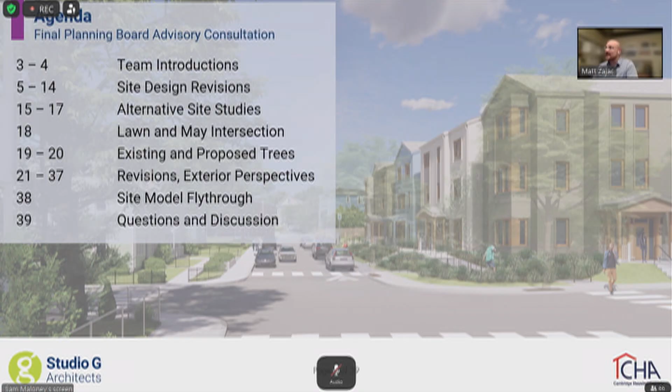Stepping back for a moment, CHA has been proud to serve the community for 90 years. CHA serves approximately 7,700 households, or 7% of the population of Cambridge. We also have a robust waiting list with over 14,000 unique households on it. Through our redevelopment projects like Corcoran Park, we seek to serve both our existing households and those families in need on our wait list.

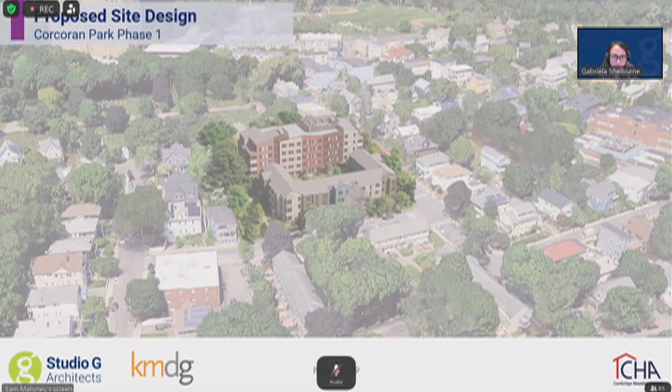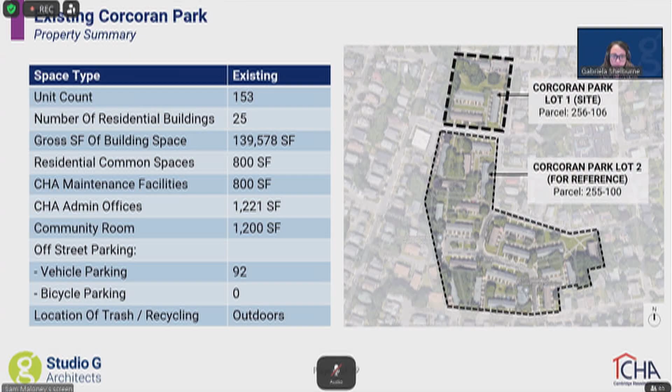Corcoran Park consists of 2 lots separated by Lawn Street. It is currently composed of 153 units in 25 buildings and 92 parking spaces over 2 parcels. Tonight, we're focusing on Lot 1, the northern parcel of land outlined on this slide. Lot 1 is bounded by May and Lawn Streets to the east and south, and the Belmont Cemetery to the north. In this lot, there are currently 29 dwelling units in 4 two-story buildings, 14 parking spaces, and 25 existing trees.

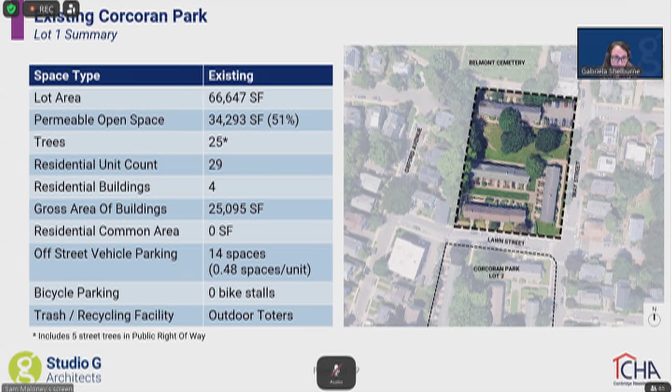The proposed redevelopment of Phase 1 will replace the 4 existing buildings with 2 buildings, increasing the unit count from 29 to 67. Changes to the proposed site design metrics can be seen in bold text on this slide. Based on advisory feedback, the total number of trees has been increased from 75 to 81. On-site parking has been reduced from 36 to 33 spaces, and short-term bicycle parking has been increased from 8 to 12 spaces. All other design metrics remain the same from our last submission.

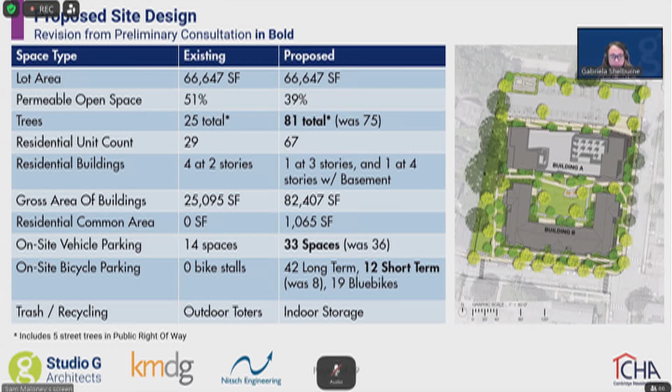Looking into the proposed development summary, Building A has 46 units, while Building B has 21. Between the 2 buildings, we propose 13 one-bedrooms, 39 two-bedrooms, and 15 three-bedroom units. On the following slides, you'll see numbers in purple. These correspond with the advisory feedback and development responses found in Volume 1 of the final submission materials.

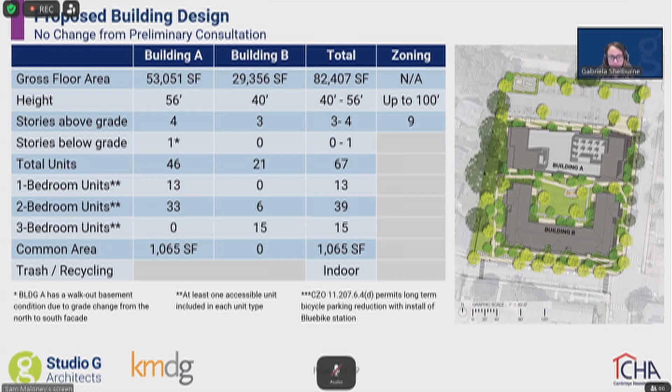Here is the previously submitted site plan. Planning board members and city staff asked that the development team consider several improvements, like continuing to explore the central courtyard design to improve its functionality, reducing the size and visibility of on-site parking, and coordinating with city staff on the curb cut location and design, improving the pedestrian experience particularly at the entrance of Building A, optimizing access to bicycle parking, and reconsidering shared balconies at the inside corners of Building B.

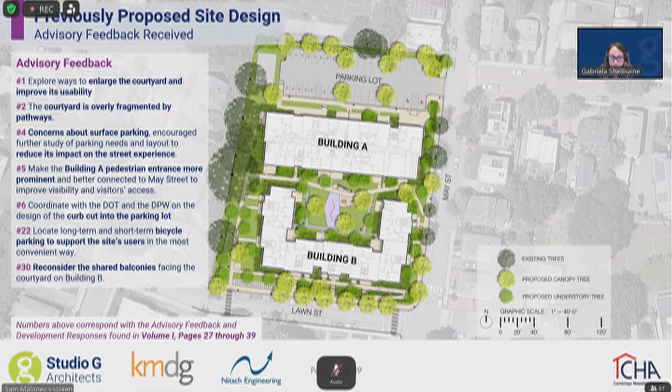To improve pedestrian connectivity, we've redesigned the main entrance to Building A, facing May Street. Three parking spaces have been removed, making room for an enlarged entry plaza with multiple connections to the public sidewalk for improved access, visibility, and pedestrian activity. This includes a front porch with fixed seating that faces May Street.

Between Buildings A and B, we've added a side stair to increase the central courtyard's connection to May Street. The community room terrace has been enlarged for greater community engagement.

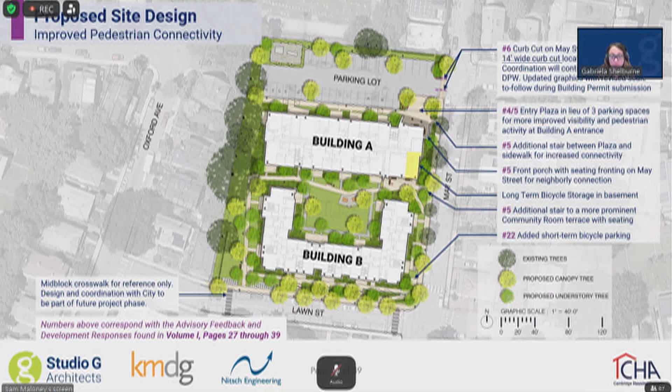Additionally, we've added 4 short-term bicycle parking spaces at the corner of May and Lawn Street. This evenly distributes short-term bike racks at the 3 public-facing corners of the site. As a reminder, long-term bike parking is located in the basement of Building A in the highlighted area.

To reduce the size and visual presence of the surface parking lot, we've reoriented the Eversource enclosure in the top left corner of the site, which allows parking to shift away from May Street. Where the parking lot is close to the sidewalk, we've located public art, fencing, and additional plantings to better mask the parking from public view and draw visual focus to the entry plaza.

We have also been coordinating the design of the curb cut with Cambridge DPW and DOT. Although this graphic currently shows a 20-foot wide curb cut, we intend to match the existing curb cut, which is 14 feet wide, shown here in purple. A narrower curb cut will reduce the amount of pavement visible from the public realm and further prioritize pedestrians by shortening their path across the drive aisle.

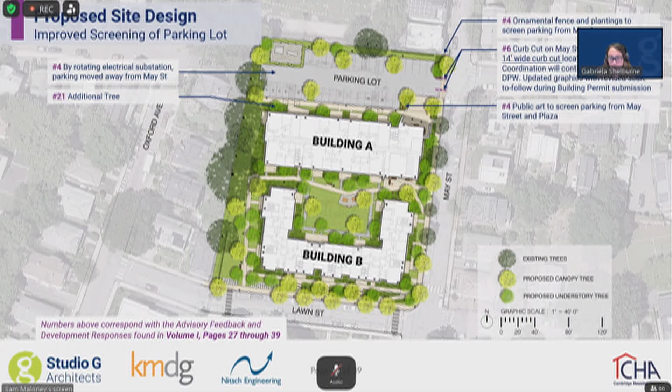Updated graphics will follow for future coordination with city staff and to be used when applying for a building permit.

We've removed the shared patios and decks from the inside corners of Building B, which were a bit problematic. To improve the open space design, internal pathways have been revised to prioritize contiguous open space rather than fragmented clusters of smaller lawn areas. Along the western side of Building B, pathways to entry porches have been consolidated, and the pathway connecting the courtyard to Lawn Street has been shifted east towards the building, giving way to a larger shared yard and less fragmented front yard zones for the units on this side of the building.

In the courtyard perimeter, paths have been pushed closer to the building, making way for a larger flexible lawn area.

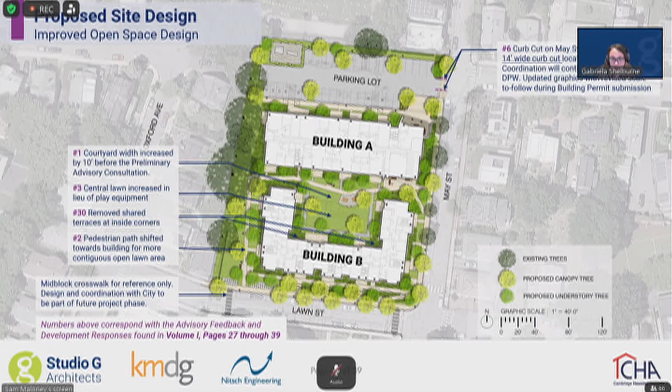You can see that the play area has been removed from the central courtyard, given that this lot is well served by existing public playgrounds. Play areas will be included in Lot 2, which offers greater flexibility to accommodate them. Here you see the Haggerty School and the Glacken Field playgrounds within a quarter-mile walk from the site.

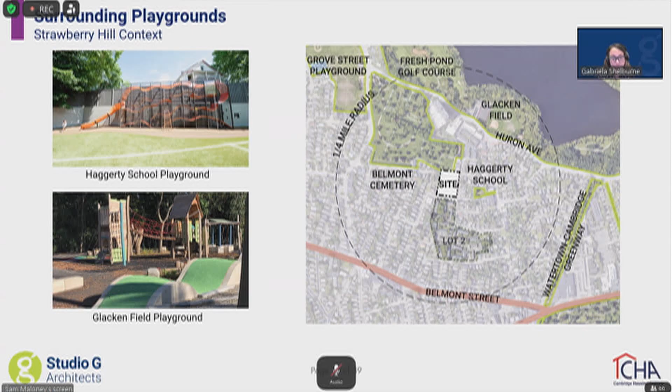In the previous meeting with this board, there was great discussion about the amount of surface parking included in the site design. It was suggested that the development team shift some or all parking below the building and extend Building A along May Street into an L-shaped footprint. The development team studied a variety of options and found that the pros did not outweigh the cons.

CHA analysis has found that podium parking below a building comes at an additional cost of $50,000 per unit, which would push the project budget out of alignment with available funding sources.

And while an extension of Building A would increase the project density, it would also compound the existing parking issues in this neighborhood, which throughout the years of community engagement we have consistently heard from residents and neighbors that parking is in high demand. CHA conducted a parking census, which informed the 0.75 cars per unit ratio the site will offer when all phases of construction are completed.

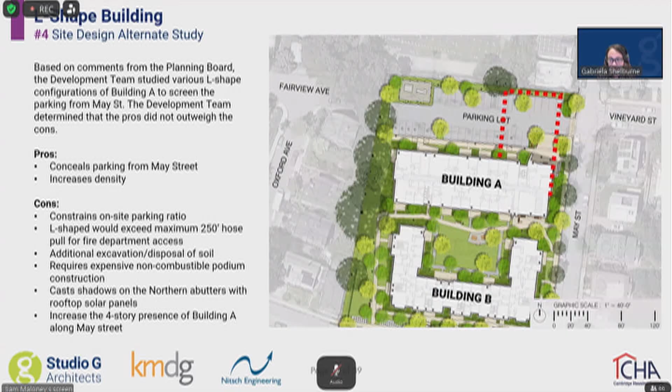This target ratio has also been informed by the fact that Corcoran Park is not well served by rapid transit, and residents have jobs with hours and locations beyond the MBTA service schedule.

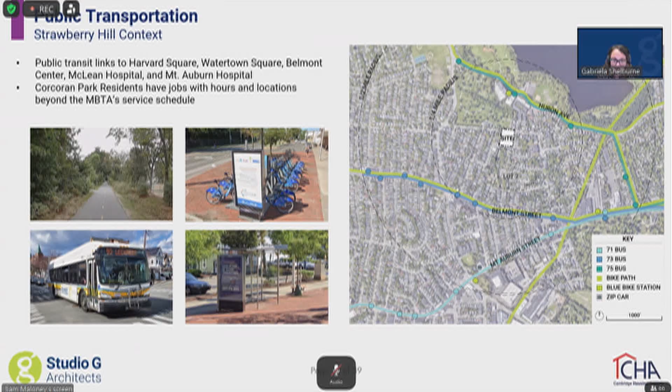Another topic of discussion at our December meeting was a vehicular, bicycle, and pedestrian connection from the parking lot to Fairview Avenue. CHA's community outreach confirmed that this path is not desired by residents and neighbors, as they have advocated against it.

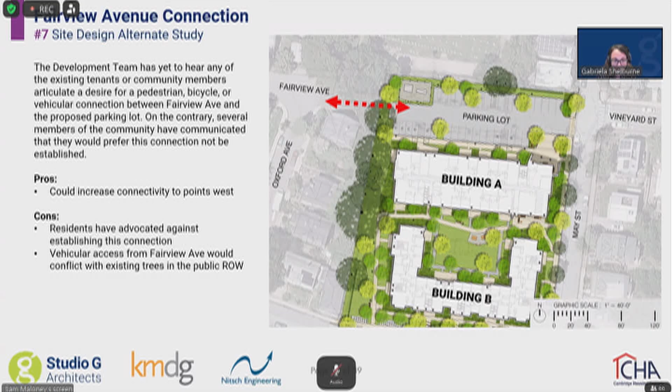Turning your attention to the southeast corner of the site, we've begun coordinating with Cambridge DOT and DPW on the atypical large curb radius at the corner of Lawn and May. They have confirmed that this intersection was rebuilt within the past 10 years. There is preliminary indication that the existing condition can remain as is, but we will continue to coordinate with them on any potential improvements to this intersection.

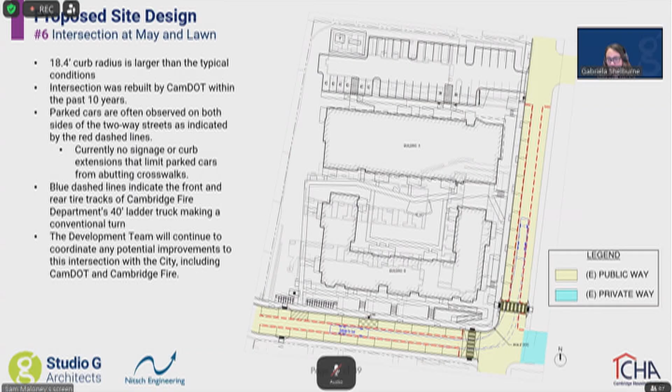I would like to shift to Mark now to respond to feedback about trees and plantings.

Thanks, Gabby. My name is Mark Klopfer. I'm a partner at Klopfer Martin Design Group, and we're the landscape architects for this project. Good evening, everyone.

The planning board asked for the clear articulation of existing trees to remain, and those which are planned to be removed, classified by their health. 17 of the 25 existing trees are intended to remain. As you can see, these are along the perimeter of the site where they have the greatest likelihood of surviving the demolition and construction process. It's shown here on the left of the plan.

Trees highlighted in red are the 8 existing trees to be removed. 5 are in good health and 3 are in fair health. Trees have been proposed for removal either because they are directly conflicting with the new building location, or the grade is incompatible with the grades required by the new FFE requirements.

We investigated options to relocate trees to be removed. However, the trees are not suitable candidates for relocation due to their health and their sizes.

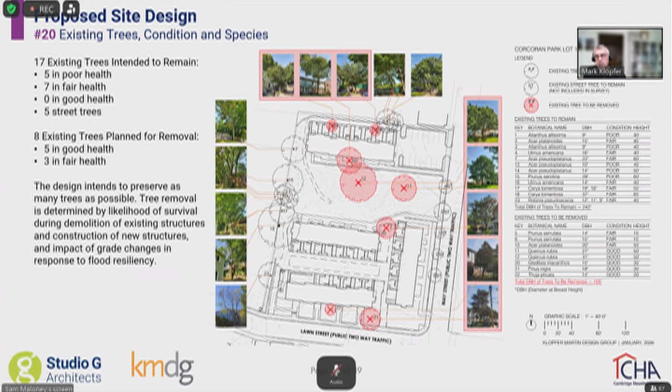Looking at the proposed condition, the design intends to add 64 new trees of various sizes and species. In our previous meeting with the planning board, we were asked to quantify the existing and proposed tree coverage on the site. We've used the diameter of breast height as our unit of measurement for this exercise, and found that the proposed conditions will provide 23 additional tree caliper inches than the site's current conditions.

You can find our full materials and plantings in volume 2, page 36 of the final submission materials, which include a diverse selection of both native and non-native species. Plant selection and location will be based on species suitability for the various conditions found on site.

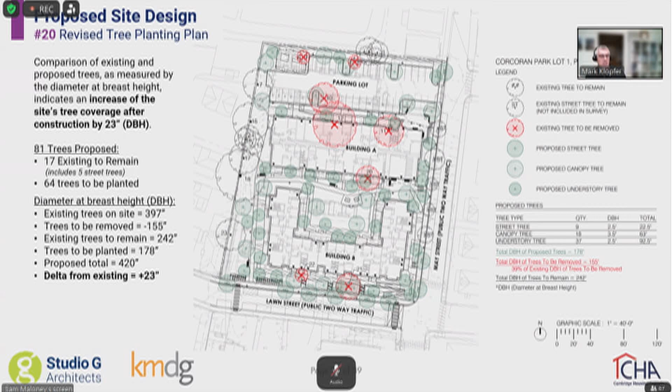And I think I'll turn it over to you now, Sam.

We'll now shift to the rendered perspective views to outline advisory comments received and the corresponding design revisions, as seen from the public realm. The remainder of the slides will feature perspective images with a key plan in the bottom right corner for reference. In this aerial, we're looking at the southwest corner of Lot 1, with Lawn Street in the foreground and Fresh Pond beyond.

As a reminder, Building A and B flank the central courtyard. Building B is seen in the foreground at 3 stories with a pitched roof. Building A, the taller red building, is 4 stories over a walkout basement.

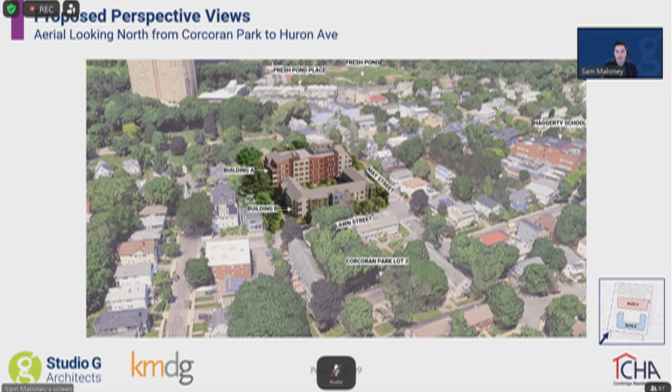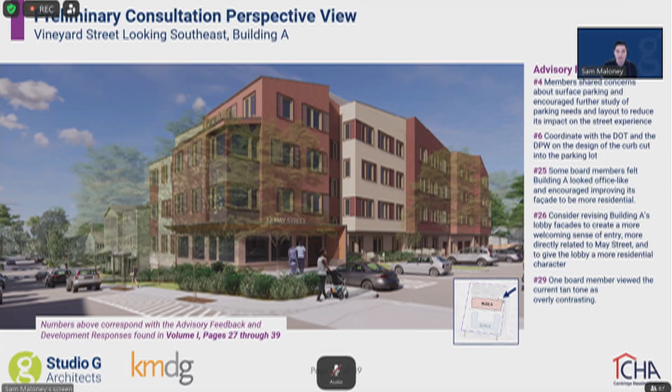As Gabriela shared on the site plan slides, 3 parking spaces were removed to make way for an entry plaza that extends out from the building's front door to May Street. This plaza includes fixed seating, visitor bicycle parking, and multiple connections to the May Street sidewalk to prioritize pedestrians.

At the back of the public sidewalk, just behind the dog walker in this rendering, a planting zone with low shrubs and a shade tree defines the boundary between public and semi-public space, while adhering to the zoning requirements for vehicular sight lines at a curb cut.

The plaza is bookended by a more densely planted area, seen behind the bicycle and seated woman in this view. The low and medium height plantings, combined with a public art installation, help to separate and screen the parking from the pedestrian environment.

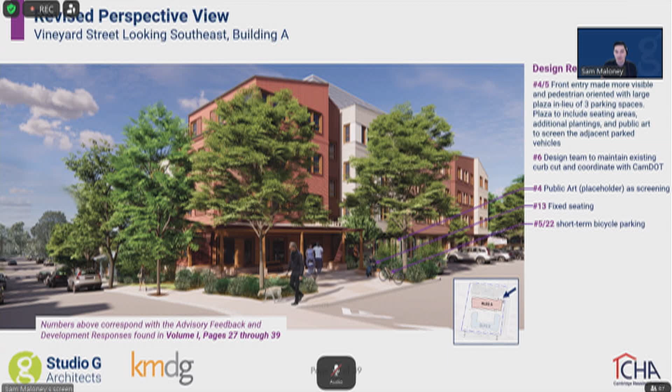To improve the welcoming and residential character of the buildings, the entry canopy has been redesigned with columns and more traditional details in reference to porches found throughout Strawberry Hill. The lobby windows have been revised to look less like a commercial storefront and more like large picture windows. In fact, many windows throughout the building now feature a horizontal mullion to look more like a traditional double-hung window.

The development team also made small adjustments to building colors and material types, resulting in a more vibrant and harmonious color palette that establishes a distinguished base, middle, and top to each townhouse-like bay of the building.

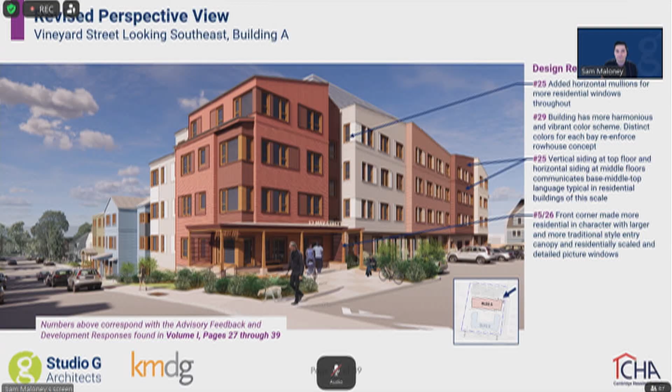The development team proposes a fence behind low, medium, and tall plantings to ensure that the parking is screened from view in all seasons. The fence is designed to maintain the character of the entry plaza, creating a coordinated edge condition on both sides of the curb cut.

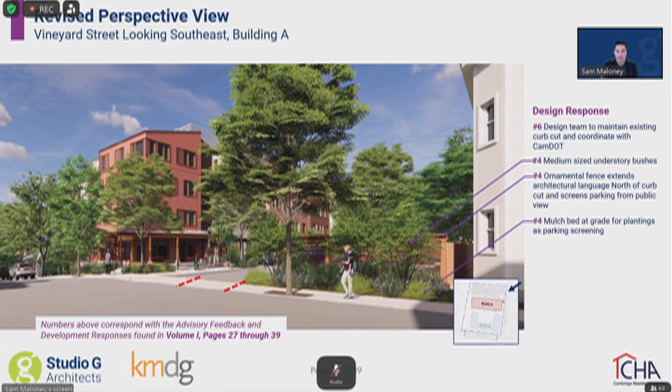This view still shows the previously proposed 20-foot wide curb cut. Once that is reduced to 14 feet to maintain existing conditions, the aperture in the street wall will be even narrower. To recap our screening strategies, the development team proposes a combination of plantings that build off of the palette you see here.

We're particularly excited by the opportunity for public art to be implemented as a beautiful and functional screening device, with a precedent designed by Forlano serving as our placeholder.

The shared balconies at the inside corners of building B were questioned, and city staff asked that the development team revisit how the southern facade of building A relates to the courtyard.

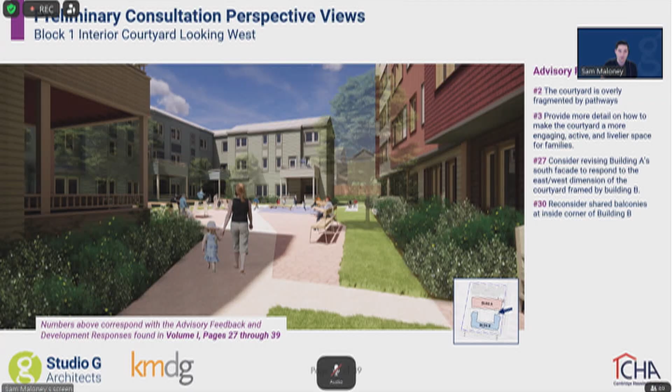Reinforcing what you saw earlier on the site plans, the revised design maximizes the flexible lawn areas by pushing pathways more towards the perimeter of the courtyard and removing the play equipment from this block. The grill and picnic table are central to the courtyard, and additional benches can be found throughout the landscape.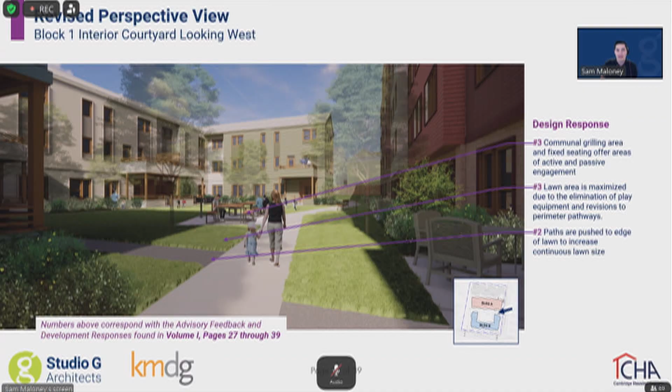Architecturally, Building B was revised to relocate balconies away from its inside corners. Decks and patios that were previously shared by multiple units are now exclusively accessed by a single unit. 10 of the 21 units in Building B have access to private outdoor space, as do 8 of the 46 units in Building A.

On the right side of this image, Building A's angled bays have been mirrored so that their return walls now face east rather than west. This reinforces the townhouse-like rhythm as seen from the eastern May Street approach.

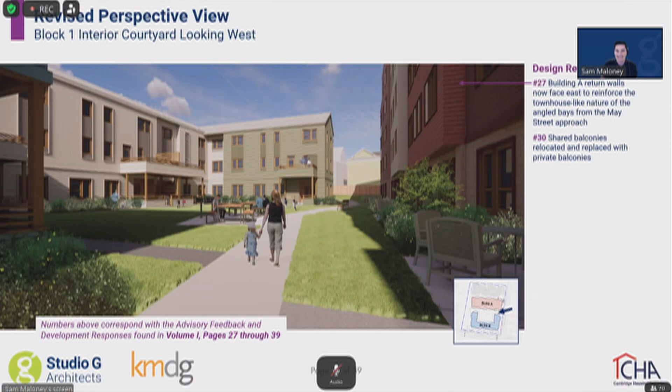At this corner of Lawn and May, advisory feedback questioned the front yard setbacks and the delineation of public and private space. It was suggested that the architecture be more residential in scale and character, with the porches, roofs, and rhythm of the massing being areas of focus.

The planning board also suggested that Building B take on a more vibrant and playful color scheme, similar to what had been presented for Building A.

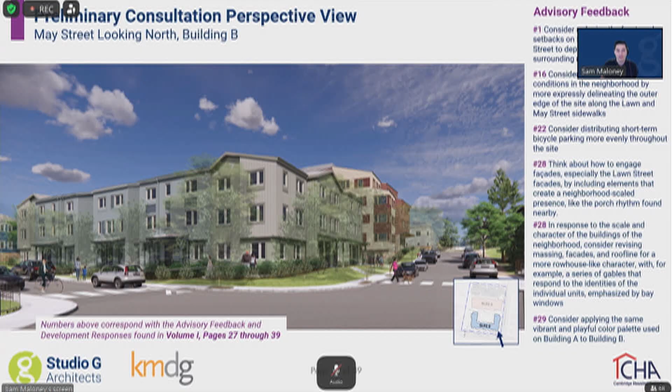The front yard setbacks have been optimized to keep the building close to the street while providing the necessary space for accessible pathways. As a reminder, the first floor of this building is elevated almost 5 feet above the existing intersection to comply with the city's long-term flood elevations and improve the site's resiliency to flooding.

There are various conditions across the frontage that define the boundary between public and private realms. Along Lawn Street to the left, sloped verges between site stairs are mulched and planted. At the accessible ramp in the center of this image, low walls are foregrounded by plantings. Along May Street, the sloped verge features medium-height plantings behind the line of street trees.

To more equitably distribute visitor bicycle parking, 2 additional bicycle racks have been located at this corner of the site.

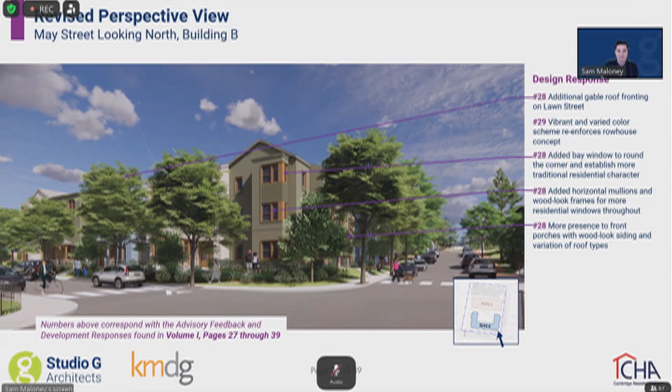Architecturally, the building corners have been redesigned to include bay windows and a more contextual roofline. There's also an additional gable at the center of the Lawn Street facade to break up the roofline and establish an ABC rhythm of housing modules.

In response to advisory feedback about the porches, entry doors have been grouped together and fronted by more prominent porches, with roof forms that vary from shed to gable and material finishes that are more visually striking.

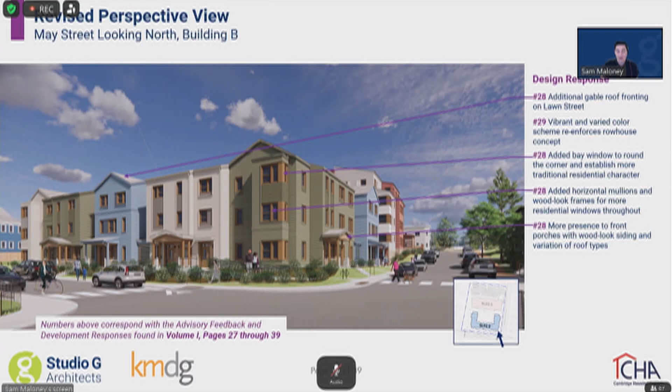Across the building, more vibrant colors have been deployed, and the windows have been updated with wood-look frames and horizontal mullions to match the welcoming and residential character established on Building A.

To round out the presentation, we'll now fly you through the site model. Please note that this animation does not include all plantings represented in the renderings and site plan slides.

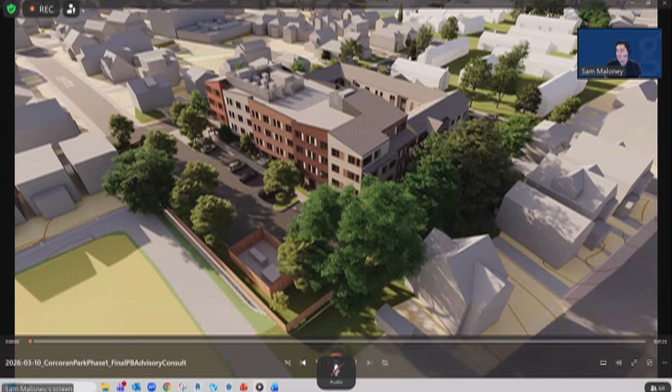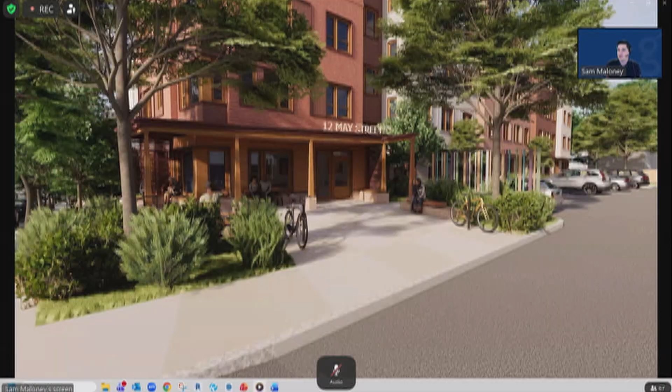We're going to begin at the northwest corner, looking south towards Building A's northern facade and the parking lot in the foreground. We'll then drop down to the May and Vineyard intersection, where we can see the screening for the parking lot on the right and the enlarged residential entry plaza as we approach, where there is fixed seating and a front porch that faces May Street sidewalk.

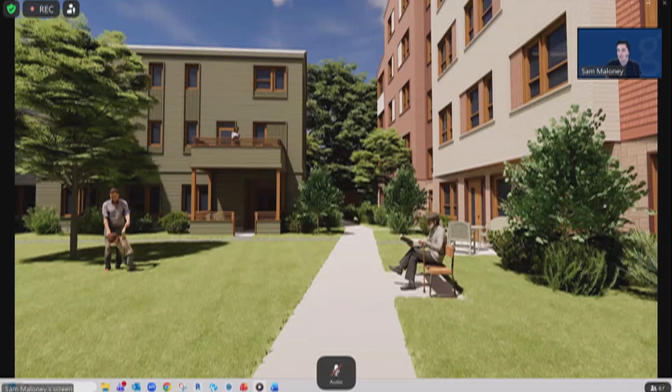As we continue down the slope of May Street, we'll turn in at the mid-block community terrace, where the community room is behind, and now into the central courtyard with the central picnic and grilling area. Continuing between buildings A and B here, we will then find ourselves on the west side of the site plan.

Where the side yard has been enlarged and the pathway moved towards the building. Turning to the front of Building B on the Lawn Street side, you can see the resilient slope required to meet the long-term flood elevation due to the lower grading for the existing street, requiring a ramp here in this corner for accessible access.

And we'll finish by rotating around at aerial level again to see the full scope of the project.

Thank you, Sam, and thank you to the rest of the team for the presentation. We're grateful for the time and look forward to public comment as well as planning board questions.

Great, thank you very much. So at this point, we will turn to public comment. According to the zoning, we take public comment at these design review sessions. I would like to remind speakers that the board's action is not to approve or deny an application, but to provide advisory comments on the design that was presented tonight.

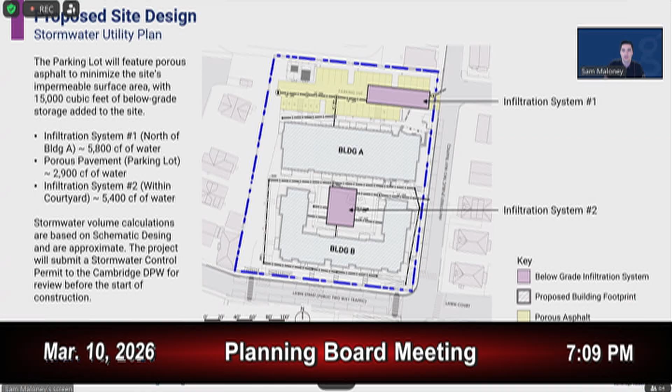Okay, so the parking lot, as highlighted in yellow, is entirely porous asphalt. And this, in addition to the infiltration system, is how we are capturing 15,000 cubic feet of below-grade storage.

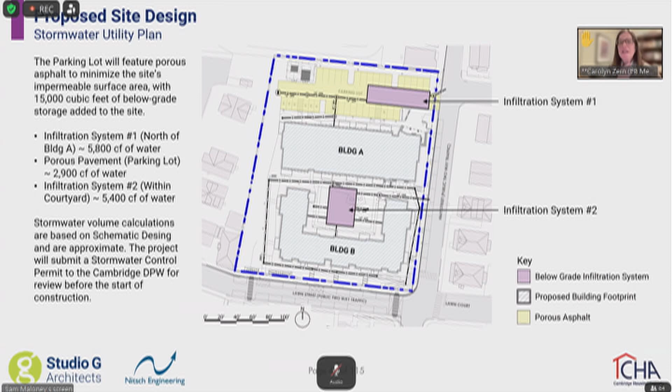Okay, great, thank you. This is Carolyn, just to clarify. It was, I think on the materials plan, it's not shown as porous, but I'm happy to see this confirmation. I appreciate it.

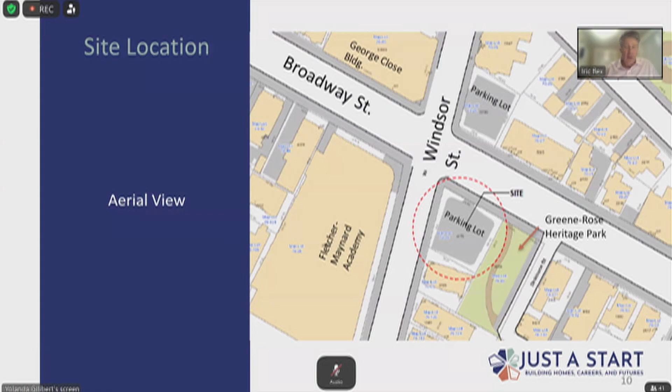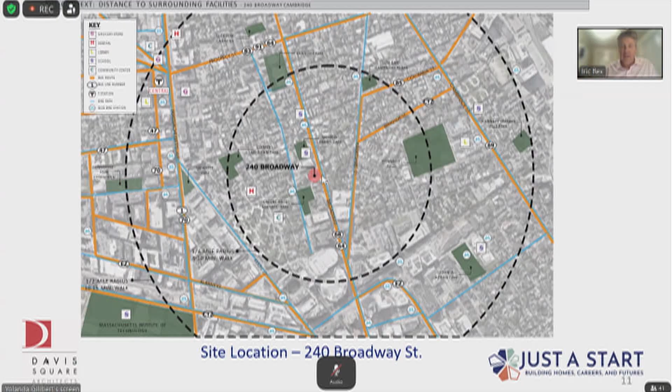The site location is served by a couple of bus lines. It's within a quarter mile of several schools and parks. The map shows how the surrounding neighborhoods have low-rise, small-scale housing, but the density is much greater along Broadway and increases as Broadway heads south from here, which you'll see in an aerial photo later.

We paid a lot of attention to context as we were designing it. The design of the building borrows from Cambridge context in several ways. This was encouraged through the community input process. I'll point out 4 ways.

One is the building height and volume is consistent with the other 2 buildings at this corner. The other building, George Close building, being 6 stories, and the Fletcher Maynard School being 4 stories, but of similar height. And both of those other buildings have little or no setbacks from their property lines. So we're kind of mostly filling up the site with a building of about the same bulk.

Second, the proposed design divides the building into bottom, middle, and top, with the bottom having greater detail to relate to the pedestrian level, the middle being fairly neutral and regular, metered by vertical divisions, much like the George Close building is with pilasters, and the top being separated by a cornice line and de-emphasized slightly with a different color and texture.

Third, the corner of the building is chamfered and slightly emphasized, modeled after the historic corner entrances to the George Close factory building. There's not a corner entrance there now, as you see, but there was originally, as well as the highly decorative corner entry at the Fletcher Maynard School, which you see in the lower left. Fourth, we're using clay brick surfaces and wood pergolas to emphasize the street level and to offer warmer colors and smaller scale, a little bit more detail at the pedestrian level.

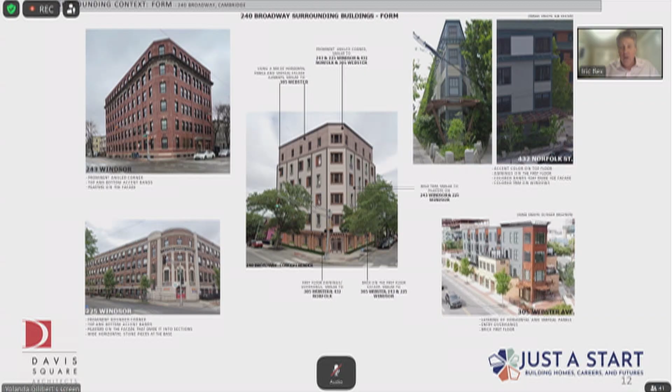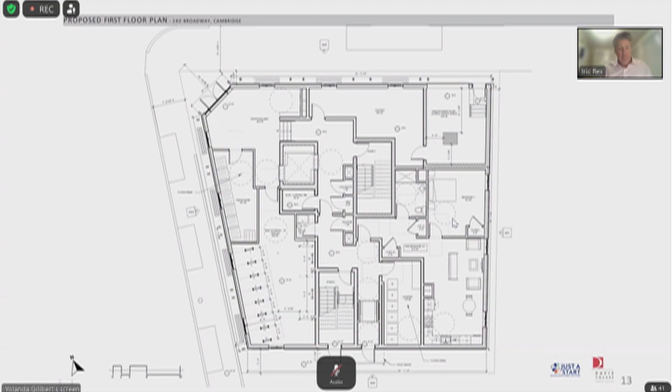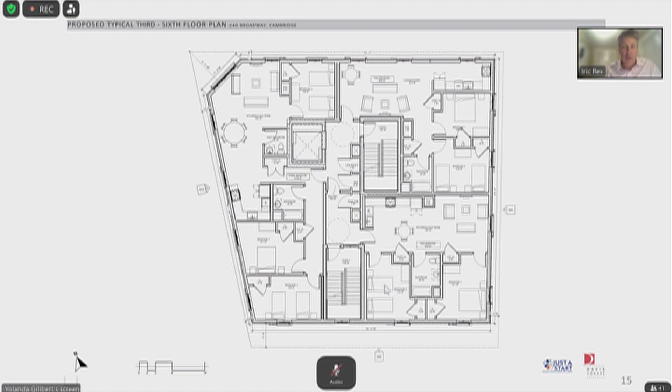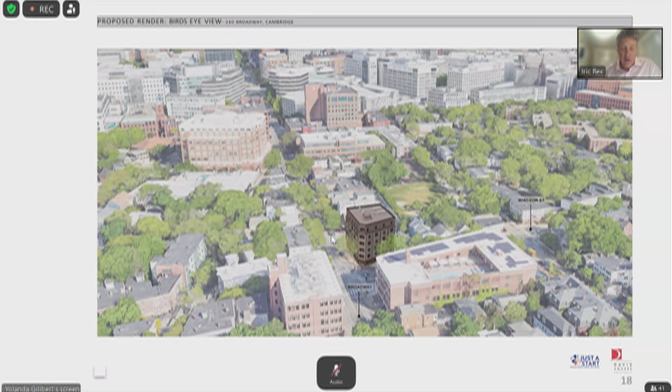We have a digital model which we are able to load and show you through. Anna is the expert in that, and I wouldn't touch it myself. So if you want, we can show you it and then field any questions.

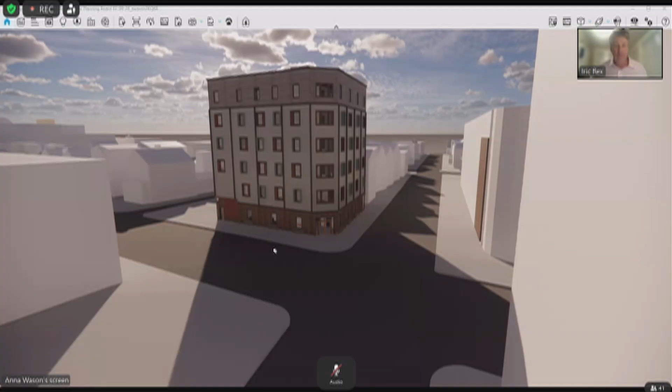We don't have, this is our model with the housing surrounding. That's from the Cambridge website. Just a pan around, we don't have any landscape that we've shown in some of our drawings in it, but this is our model showing what our current design looks like. As Ira had said, in this left corner, this is Broadway, this is Windsor, and this is our transformer room access, which we've moved, and then this is our strong corner. But we can move through it later as well if needed.

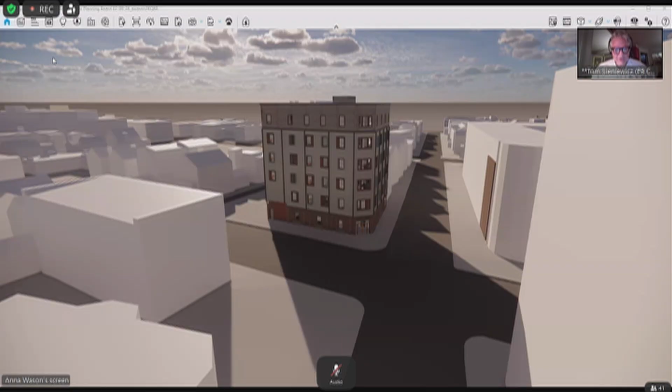Actually, Anna, while you have it up, I'd very much appreciate some focus on the elevations adjacent to the context, next to the house and next to the park. Yes, the other two sides. Can you just flip it around? Yes, let's have a look at the other two sides.

Oh boy, sorry, it's just moving. Okay. The beauty of technology. I can try and move it, sorry. There you go, there you go.

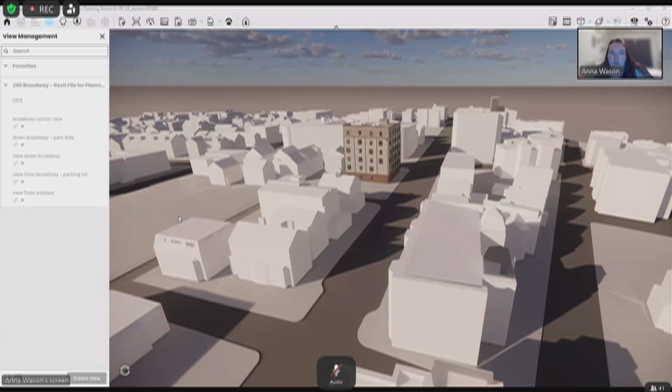Are you done? That's all that we have. We have some backup slides on other issues if there are particular questions that came up, but we are mostly here to hear from the board. Great, thank you. Anything else you need from us, we're happy to share. But thank you, Mr. Sawyer.

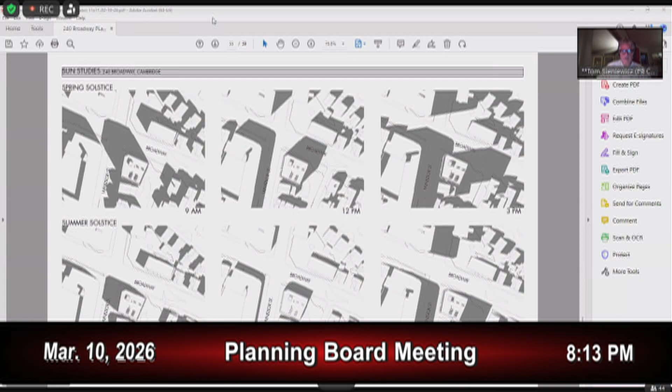Can you go back to the equinox and solstice view? Thank you. So I think that's great, that's helpful to be able to see that one more time. Thank you for bringing that up.

Diego. I appreciate your comment on the windows that belong to the units above the ground floor. I was wondering if you could have a similar explanation or talk through one of the CDD memo's comments on the ground floor. I did feel like it looks a little squashed. I know it's tricky because the windows to those program spaces are like trash rooms and bike rooms. I was just wondering if you all had thought about that comment from the CDD memo.

Yeah, I'll talk a little bit about this. We're very happy to get this memo with a lot of comments, and we're still working our way through it because it was very recent.

One of the things that affects the ground floor windows is the fact that most of the spaces on the ground floor, as I pointed out, were transformer room, bike room, laundry room, things like that. We purposefully don't want giant windows onto the bike room where people are going to be worried about theft, I guess. We have a lot of glass at the front lobby entry, which we want to be nice and bright and also transparent for security and safety.